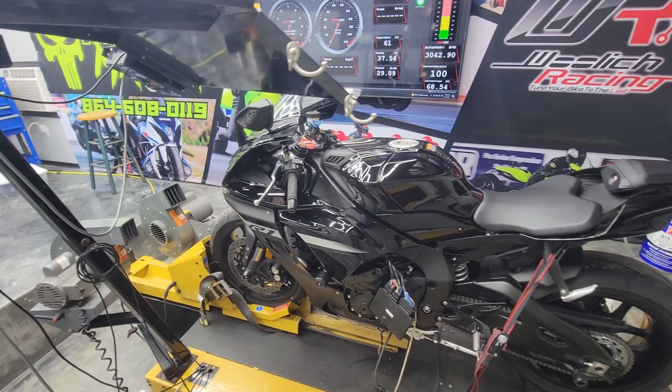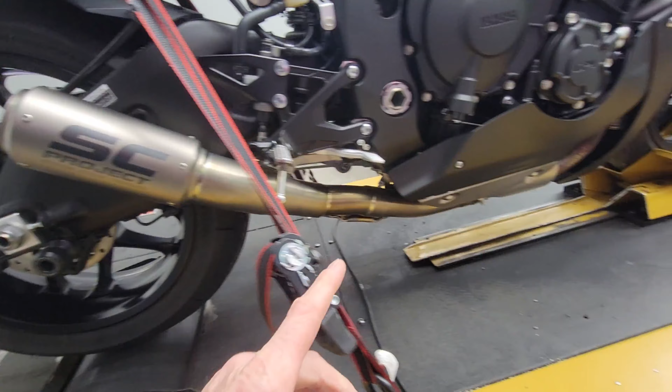We got a brand new 2024 Yamaha R1 on the dyno. This is our first 2024 that we're doing here in the shop. It's supposedly the same as a 2023 - we're gonna find out, are the results the same? This one has some good modifications done to it already: SC Projects 3/4 exhaust system, pair valve block off plates, Sprint F185 air filter, so it's got the race air filter in it, and it also has some World Superbike velocity stacks.

So we're gonna find out, are all these modifications worth it, and how much power is this thing gonna gain from the ECU flash and tune? Buying all these expensive parts really don't do much for you with these bikes until you flash the ECU. They have crazy heavy restrictions in the ECU, and we're gonna be getting rid of those today. Stay with us, guys. Here we go.

Here we go, guys. We got the bike all warmed up. We're about to do the baseline pull and see what kind of power this thing makes. Remember, crazy heavy restrictions, so don't dial off the channel once you see a low dyno number - that's only the beginning, guys.

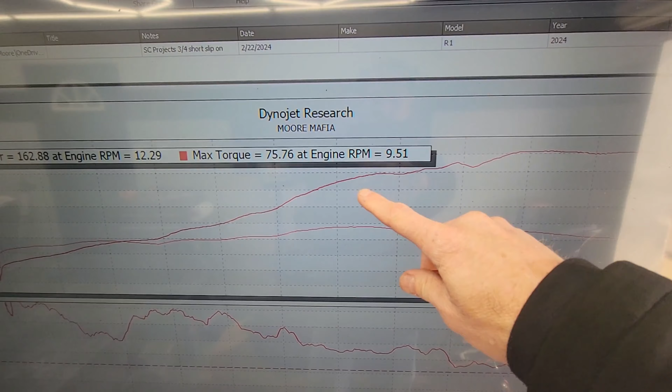Results are in, kinda sad. So let's just say this bike is about $17,000 or $18,000, just guessing, and he's got probably a couple grand in modifications. Look at how sad she is, boys. Our horsepower curve, awful dippy. Our air fuel ratio, absolutely horrendous. We got a lot of work to do here today, guys.

All this dotted line, this is about where we want to be for our air fuel ratio. All this above that line is how lean this thing is, meaning not getting enough fuel. We got to fix all that in our Woolich Racing software. Here we go, guys - ECU is flashed. We're ready to roll. Let's see how this thing performs now.

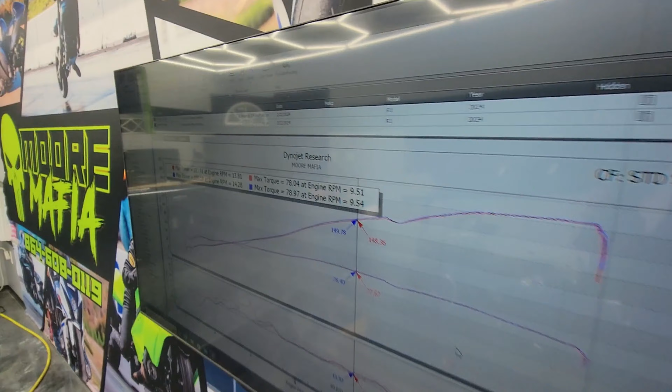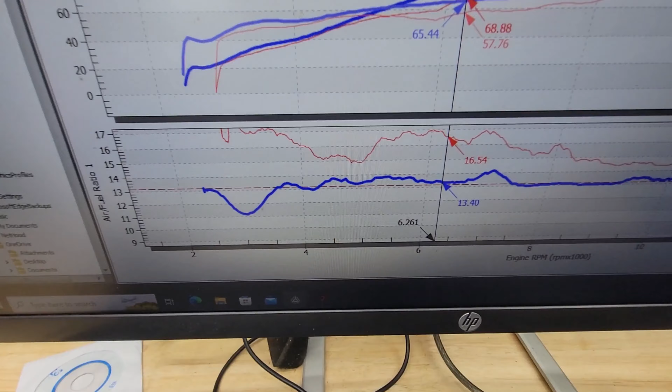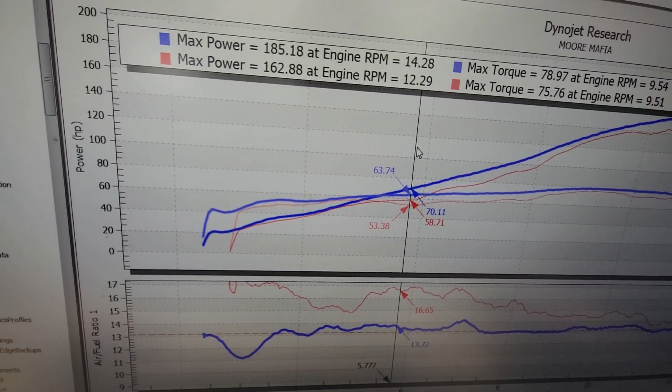All right, guys, right off the rip, we are already up to 185 horsepower, 78 foot-pounds of torque. We got the air-fuel ratio pretty smooth, a lot smoother than it was to start with. Let's overlay it with the first pull so you can see just how much of an improvement we've got already. And just like that, you can see in the top end, we've picked up 23 horsepower at 13,500 RPMs. But mainly, look at how much better the air-fuel ratio is here, the blue line versus the red line. And then you can see also the horsepower we've increased from 77 horsepower to 89 horsepower. Right here, we went from 53 horsepower to 63 horsepower. So we got some big gains already.

Give me just one second and I'm gonna show you how we got a lot of these gains. So let's take a second to talk about why did this R1 suck so bad. We go in here to our Woolich Racing software and then we open up a file from a brand new R1 in stock formation, and then we click on other maps. So then we go to the electronic throttle valve table, power mode 1, which is what we're running it in, and then gear 5, which is what we dynoed it in.

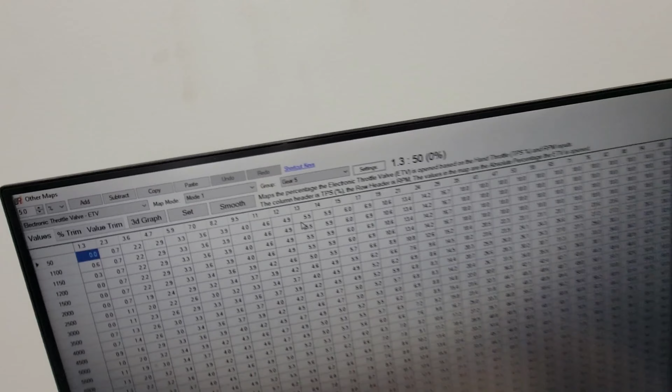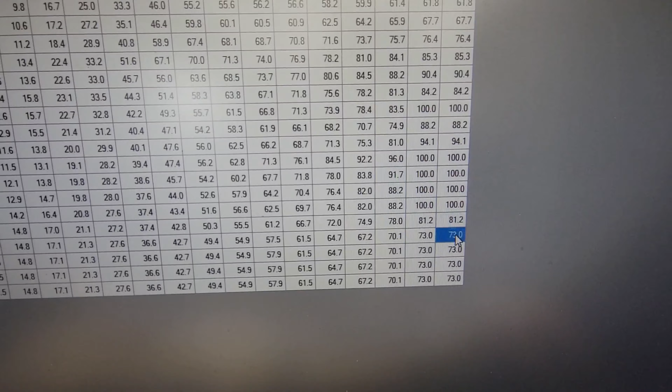And then you can see this is the amount of throttle that you're giving it, this is the amount of throttle that the bike is giving it, and this is the amount of RPMs we got. So as you can see, as you go 100% throttle, the bike tapers up the throttle. You can see it goes 100% throttle - that's at 8,500 RPMs. But then you can see it cuts back the throttle. So at 13,000 RPMs, it's only getting 73% throttle, which is why our power went up and then kind of a straight line - it didn't keep going.

In this software, we have the ability to go in and change this, and we can now set this at 100% throttle, so that way when you go wide open, the bike stays wide open. We alter all this to make the increase faster, have more mid-range, have everything.

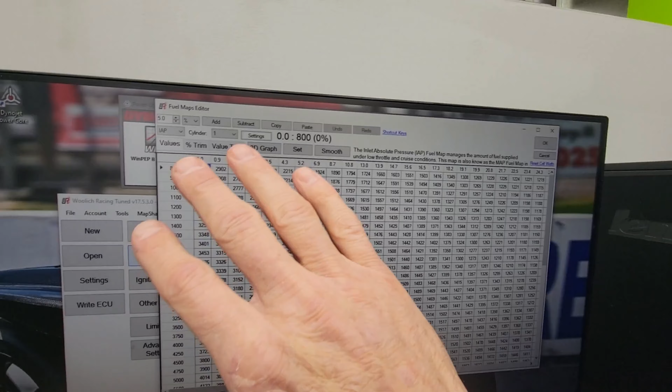Then we can go into your fuel mapping table and adjust every single thing in your fuel map from 800 RPMs all the way to red line, so we can control all that stuff to dial in the air-fuel ratio for the modifications you have.

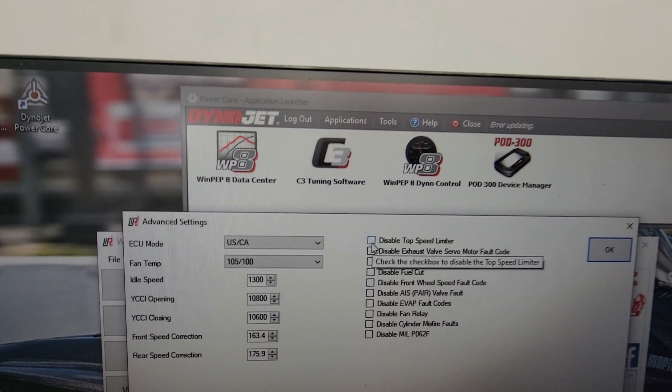We can do a lot of this stuff through the mail. You send us your ECU, we put in a tune that we have done here on the dyno before for similar modifications to what you have, and the thing is going to run a million times better just by mailing in your ECU. We can also disable the top speed limiter.

We can disable the exhaust servo motor. We can disable the decel fuel cut, so that way when you let off the throttle, the bike doesn't do that nosedive thing, where you feel that back and forth sensation that rides terrible. We smooth all that out and turn that off, so when you let off the throttle, the fuel injectors keep spraying just a little bit of fuel in order to keep things ready, so when you resume throttle, the fuel is already there. It will make the bike run much, much smoother.

If you do AIS block off plates or pair block off plates, we can eliminate the code for that. We also lower the fan temps. All that stuff is done standard in our ECU flash.

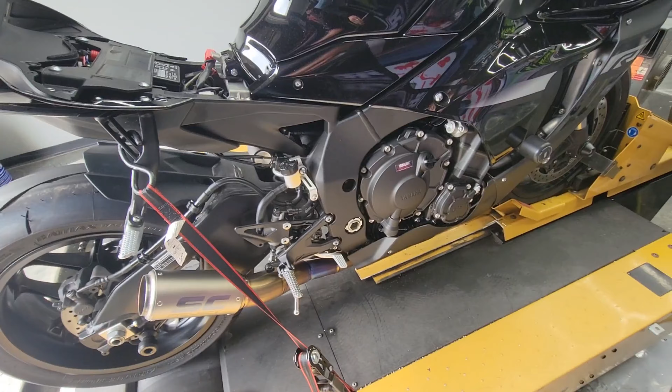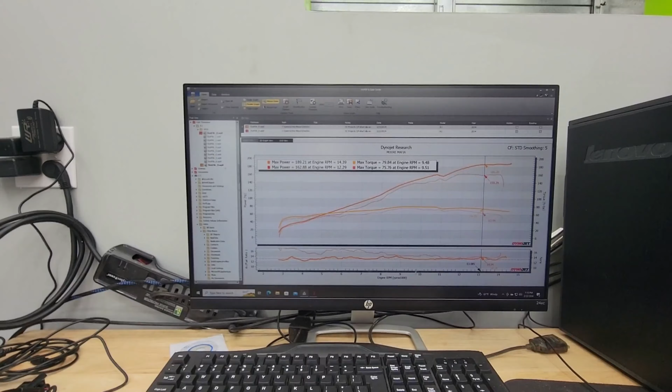All right, let's see what our final dyno numbers are. This thing is all dialed in and ready. Let me pull up the before and after on this 2024 Yamaha R1. Take a look at our finished product, guys.

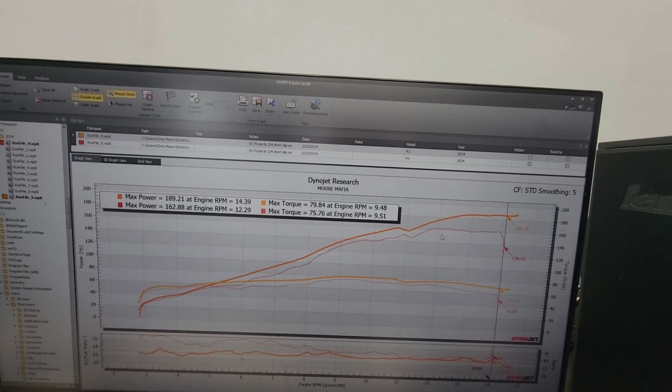We started out with 162 horsepower. We ended up with 189 horsepower, so you can see we got huge gains. Not only that, the factory bike hits the rev limiter super early. You can see here at 14,000 RPMs, where the stock ECU is done, we're still making 186 horsepower, guys. This thing revs to the moon and keeps on making power.

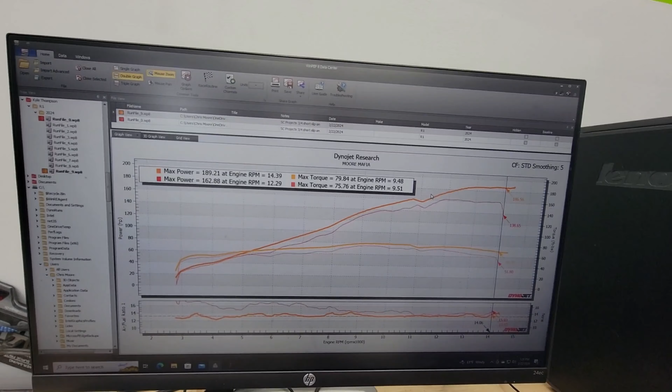Now this is our moving velocity stacks. They're going to move on these things, and that's what creates that little power dip, but they give us way more torque and way more power down low.